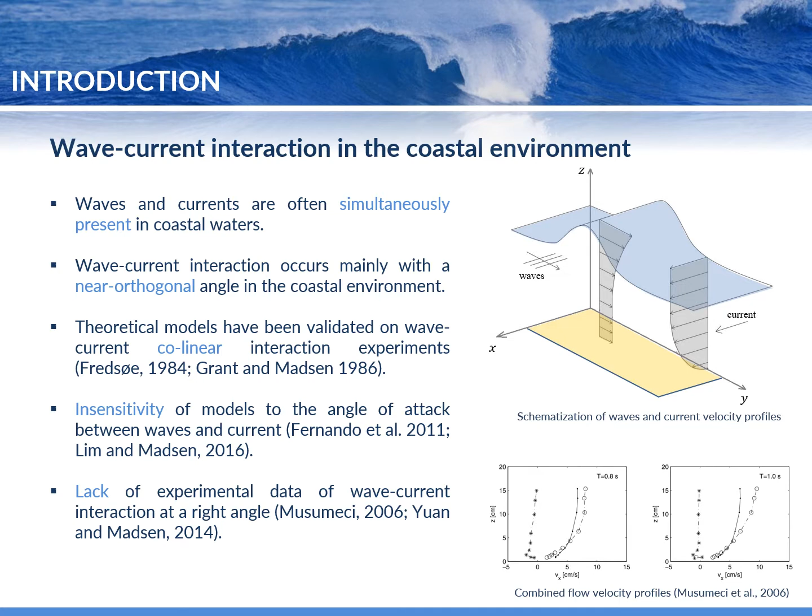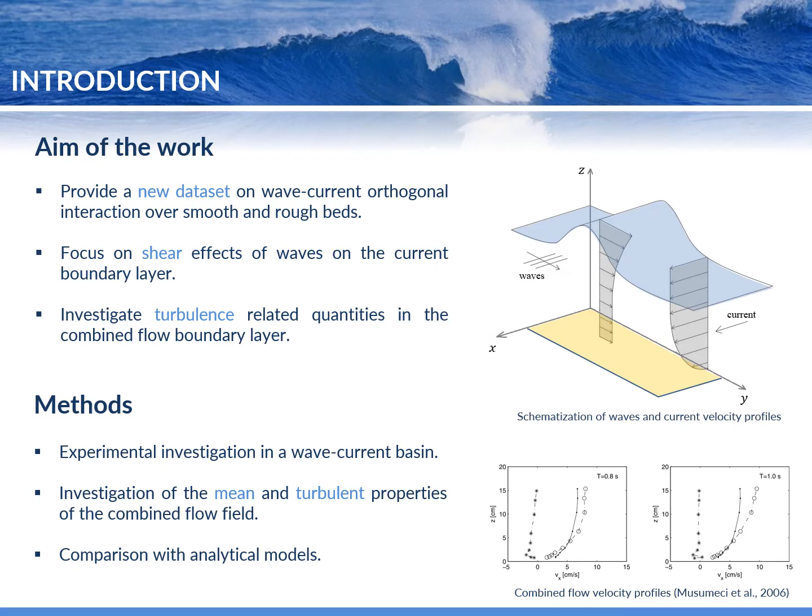So the objectives of this work are to provide a new dataset on wave current orthogonal interaction over both smooth and rough beds, with a particular focus on the shear effects due to the superposition of the waves on the steady current, and investigate the turbulence into the boundary layer. This has been achieved with an experimental investigation in a wave current basin in order to study the mean and turbulent properties of the combined flow field and operate in the end a comparison with some analytical models.

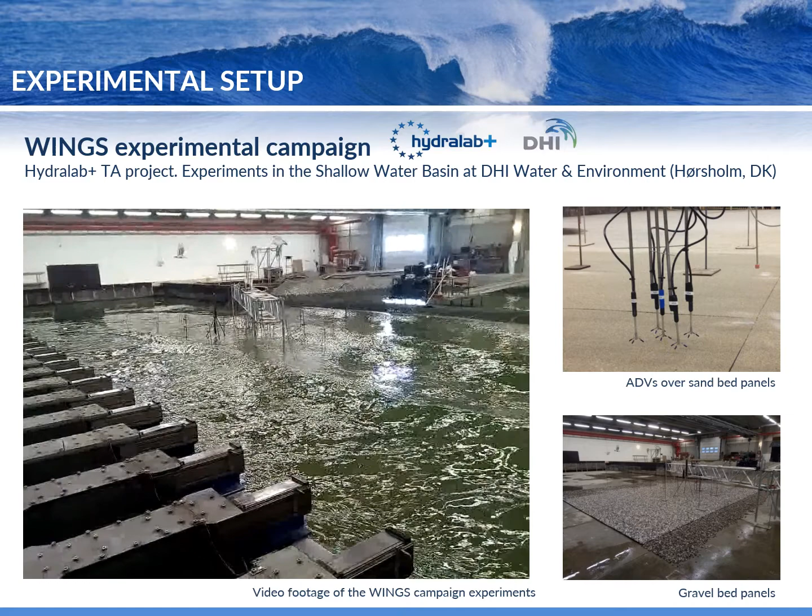The shallow water basin is 35 meters long in the current direction, 25 in the wave direction, and 1 meter deep. It is provided with current recirculation systems, which allows the generation of a steady current with a constant discharge of 1 cubic meter per second. It is also provided with a wave maker, which allows the generation of regular and irregular waves. And two series of panels have been positioned in the wave current interaction area in order to reproduce two different roughnesses. A first series with fixed grains of sand on top, and a second one with gravel.

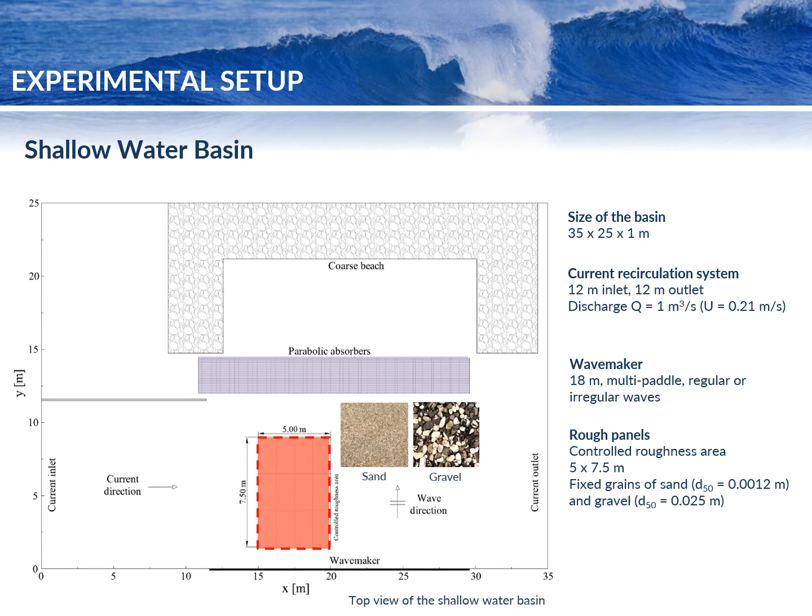An array of 24 wave gauges have been positioned all over the measurement area in order to measure wave height and water level. And into a specific spot of the measurement area, 5 acoustic Doppler velocimeters have been positioned in order to measure velocities and reconstruct velocity profiles.

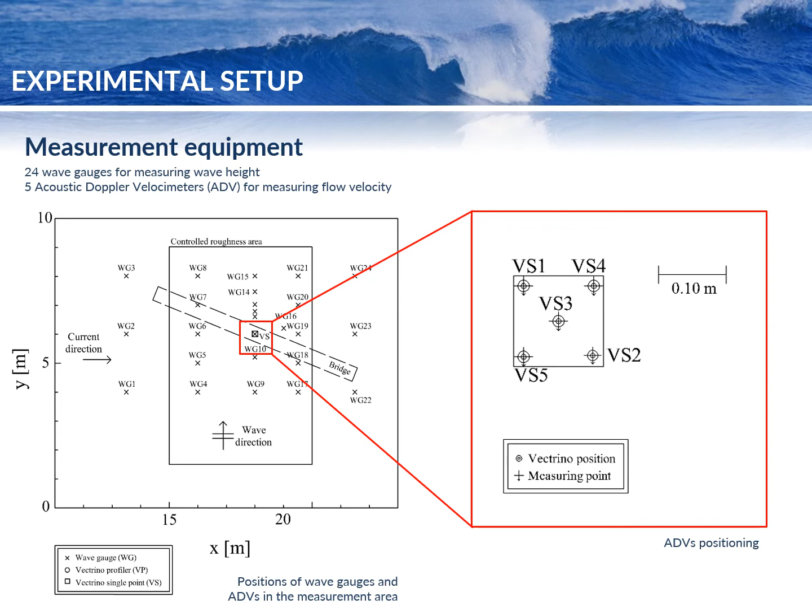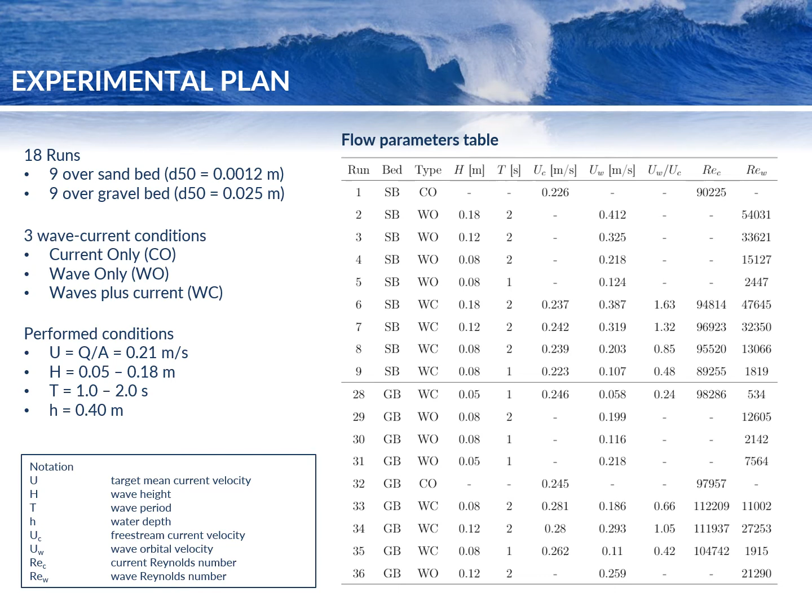A total of 18 runs have been carried out, 9 of which over sand bed and 9 over gravel bed. 3 wave current conditions have been performed: current only, wave only, and wave plus current. And a range of wave conditions in terms of different wave height and period have been conducted. From the velocity measurement, a series of other quantities have been computed, such as free stream velocities, wave orbital velocities, and their relative Reynolds numbers.

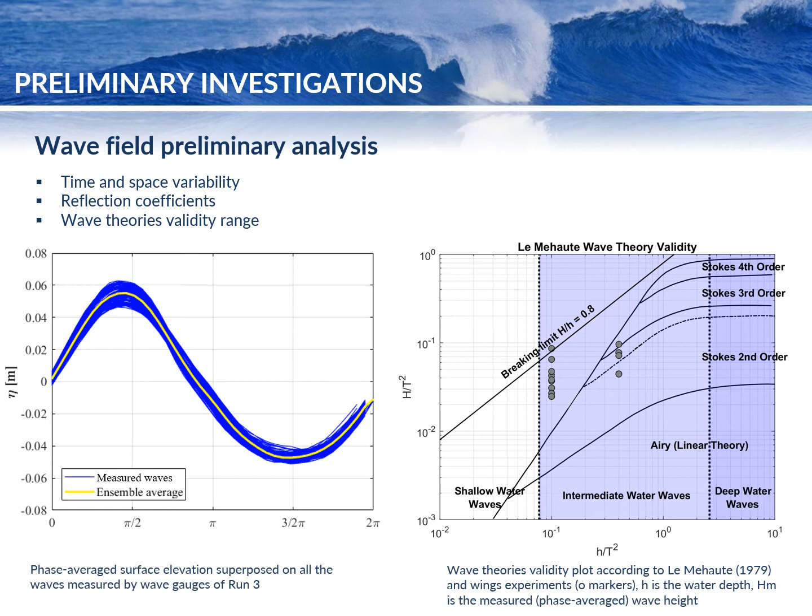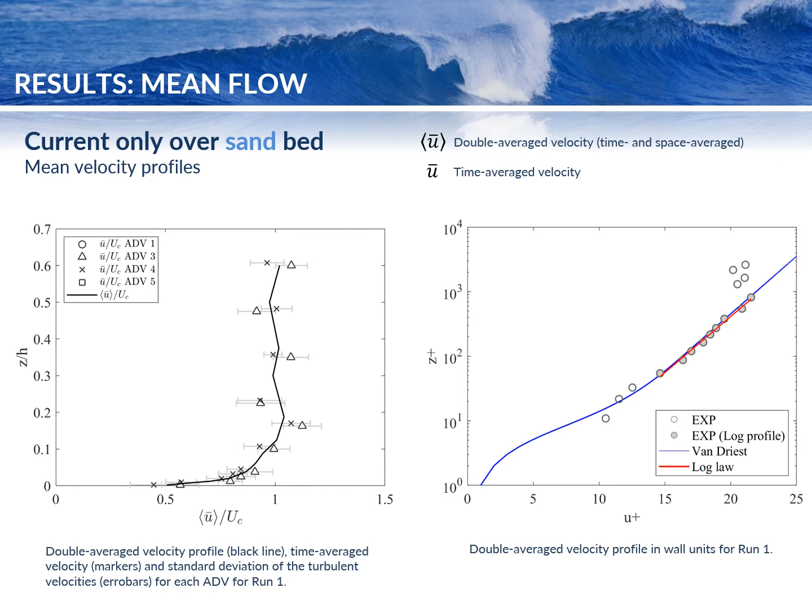On the right, you can see the same double averaged velocity profile, but in wall units, superposed on the logarithmic law and on the Van Driest theoretical profile. As you can see, the logarithmic profile, which is denoted by the gray circles, aligns satisfactorily with the theoretical profile, which means that the boundary layer is fully developed.

This slide is analogous to the previous one, but over gravel bed. You can see a decrease of velocity at the bottom due to the presence of the rough bed and the corresponding increase of free stream velocity in comparison with the previous case. And on the right, you can see the same velocity profile aligned with the theoretical profile of Van Driest.

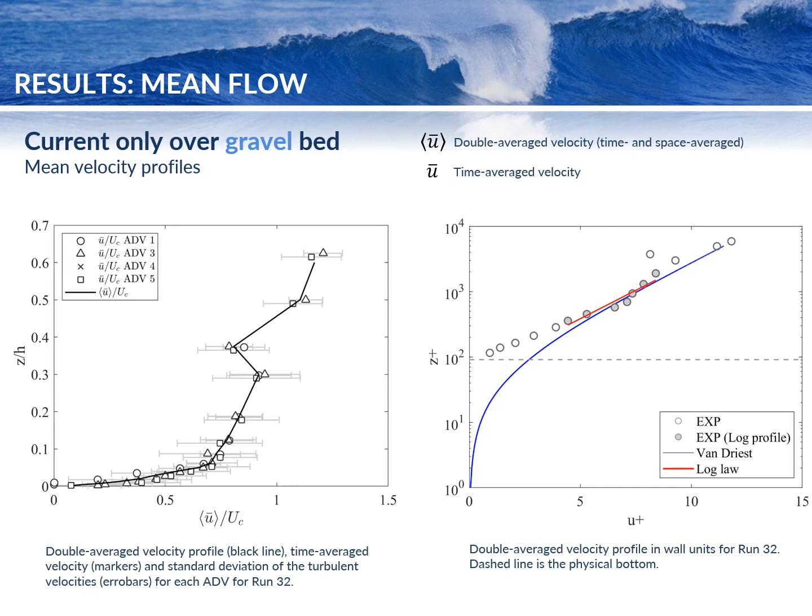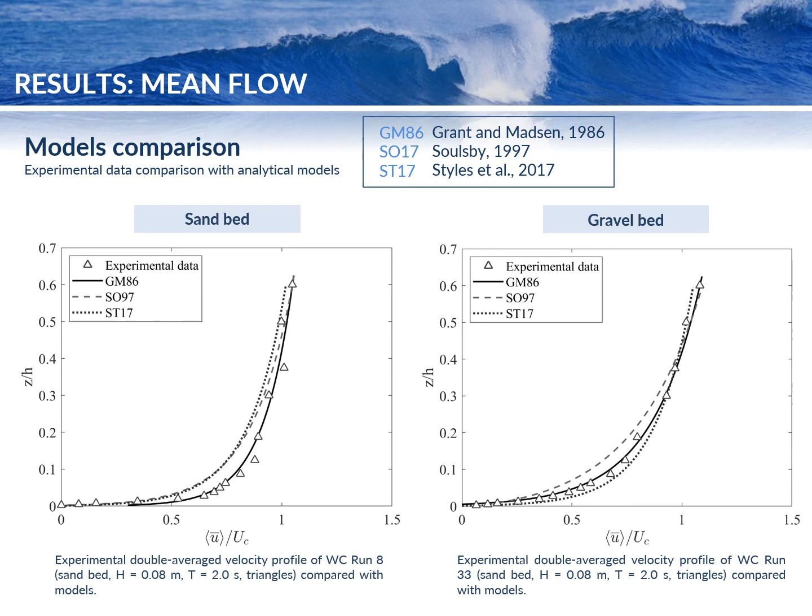The present panel shows a comparison between the experimental velocity profiles and a selection of analytical models: the Grant and Madsen continental shelf model, an empirical formulation by Soulsby, and an eddy viscosity model by Styles et al. The best performance is always returned by the Grant and Madsen model, whose velocity profile estimation deviates from the experimental data up to 5%, whereas the Soulsby empirical formula usually underestimates the profile up to 15%, and the Styles et al. eddy viscosity model usually underestimates the velocity profile over the sand bed and overestimates over the gravel bed up to 20%.

Let's move on to the turbulent flow analysis. What you see here is a comparison between the current-only (circles) and the waves plus current (triangles and diamonds) Reynolds stress profiles over sand bed on the left and over gravel bed on the right. The figures show that the superposition of waves always determines an enhancement of the turbulence production at the bottom, and in some way confirms what we have seen in the mean flow analysis.

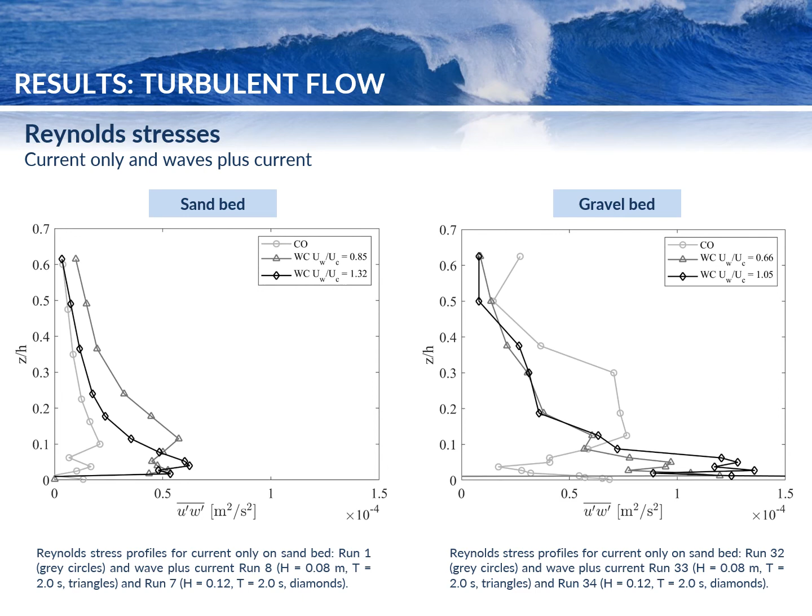It has been observed that most of the turbulent kinetic energy transport in steady current flow occurs during the succession of two events called ejections and sweeps. Quadrant analysis is a technique which, at least to my knowledge, has never been used in the study of wave current orthogonal interaction, that allows us to study these ejection and sweep events starting from the turbulent velocity time series. On the right, you can see a schematization of the quadrant analysis. On the x-axis, there is turbulent velocity in the current direction, and on the y-axis turbulent velocity in the vertical direction.

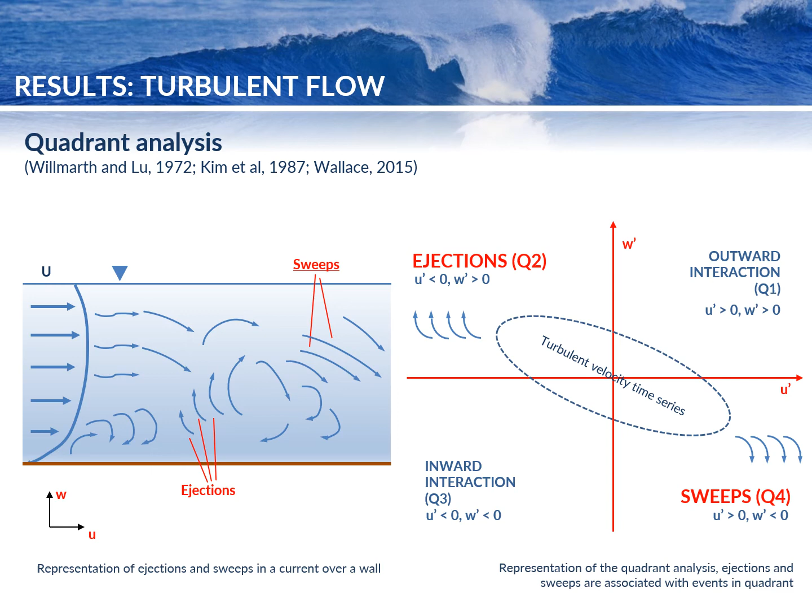Ejections and sweeps are associated with quadrants Q2 and Q4, so basically when the two turbulent velocities have opposite sign. This is an example of quadrant analysis. The numbers in light blue in each quadrant indicate the relative number of events that fall into each quadrant. But not all the events in quadrants Q2 and Q4 will be considered ejections or sweeps, only the ones that are above a certain threshold called the hyperbolic threshold, and this threshold is proportional to the Reynolds stresses and is shown in the graph by the hyperbolas in red.

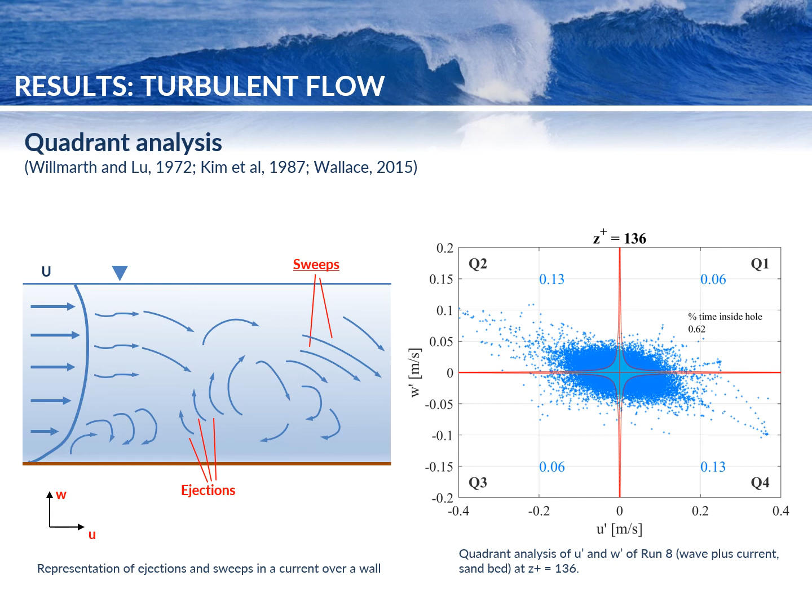In this panel, you can see the current-only quadrant analysis over sand bed on the left and over gravel bed on the right. If you look at the number of relative events in quadrants Q2 and Q4, you can see that between the sand bed and gravel bed, there is not a huge difference. This seems to suggest that in presence of a rough bottom, the turbulence enhancement is not due to an increase of the number of ejections, but rather an increase of their intensity.

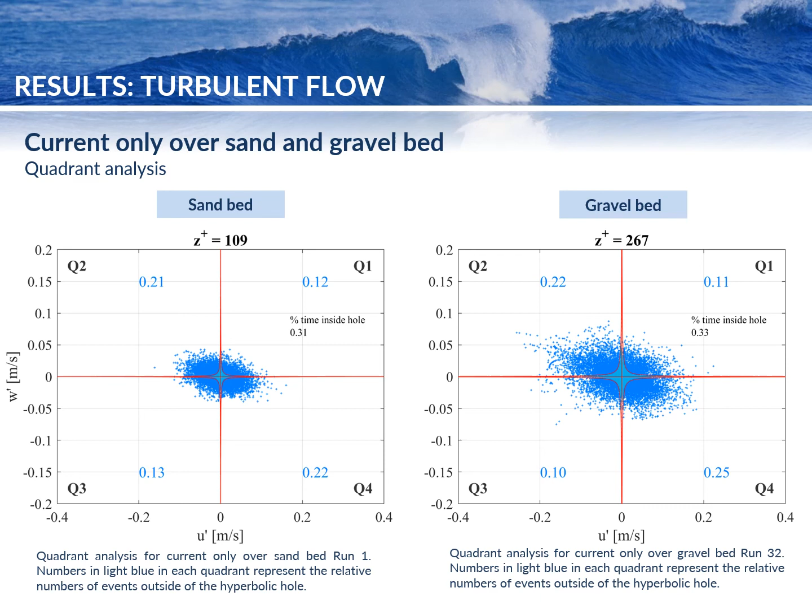Instead, in the waves plus current case, in comparison with the current-only case, we notice a decrease of the relative number of ejection and sweep events. But we know from the Reynolds stresses that the superposition of waves causes a turbulence enhancement at the bottom. It is possible that in a certain part of the wave phase, the ejections and sweeps of the current may be suppressed, while in other parts of the wave phase they may be enhanced, because overall we have a turbulence enhancement. However, in order to say that for sure, we should carry out a phase-averaged quadrant analysis, which is under development at the moment.

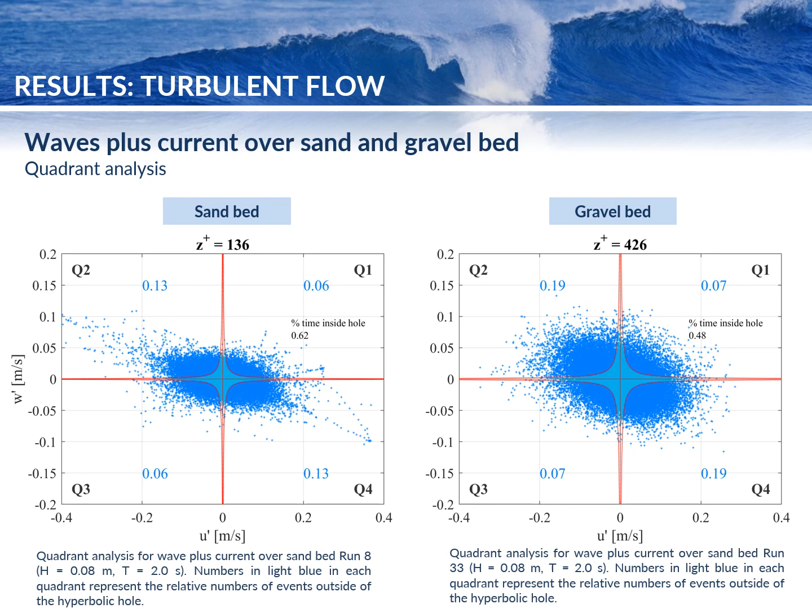So in conclusion, the presence of waves always determines an enhancement of shear, which is shown by the increase of the friction velocity and the equivalent roughness. A non-monotonic relation has been observed between the shear experienced by the current and the wave current parameter UW to UC. And among all the models that we have compared, the Grant and Madsen model showed the best performance in predicting the velocity profiles and the shear velocity.

The Reynolds stresses confirmed what we have seen in the mean flow analysis, while the quadrant analysis showed that the superposition of the oscillatory flow induced a decrease of turbulent ejections and sweeps, but an increase in their intensity. But this for sure requires further studies.